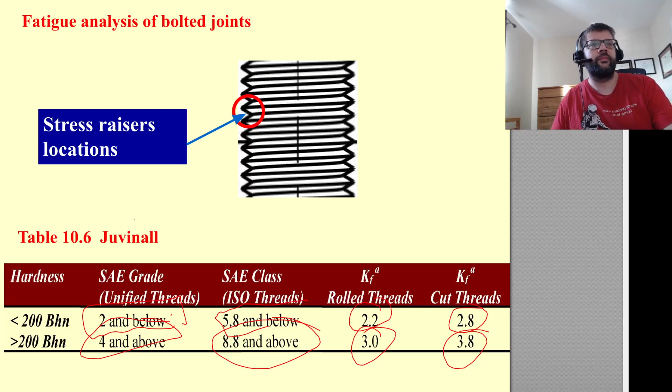And of course, we need to figure out what our strength is, our SN. Most everything else is going to be calculated based upon the way we know. So we calculate our SN prime the same way. For load factor, again, we are loading our bolts in tension. If that's not what's going on there, then you're loading your bolts wrong. So we're going to be using the CL of 0.9.

Gradient factor, again, that's just based upon what our nominal diameter of the bolt is. So the D that we use here, this is from table 8.1 in Juvinall.

So if the nominal diameter of our bolt is, say, half an inch, and we're working in this range, it's reasonable to extrapolate a bit. So if you're at the higher end of the range, so closer to a 2-inch bolt, then it's not unreasonable to use say 0.7. But you can also just pick something in the middle there. Both of them are reasonable approximations.

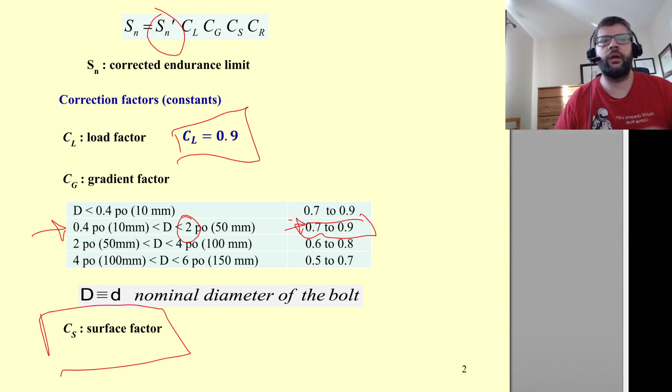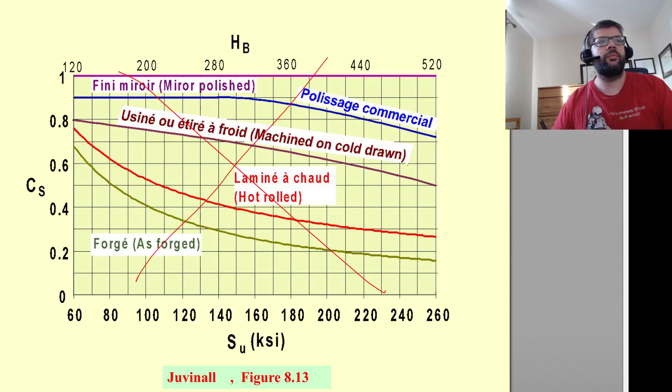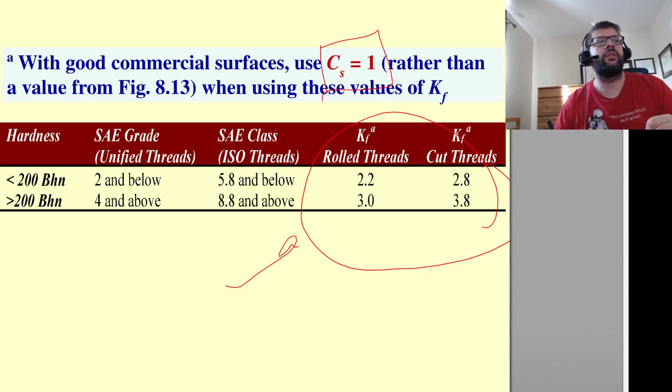For the surface factor, it's simpler. Instead of using this, we don't bother with that, because if we are using a good commercially purchased bolt, they've got good surfaces. So we can just go ahead and use the CS of 1. That's if we're using these values of KF. This is basically the primary thing we're saying here, that this kind of already builds the surface factor into these KFs, basically.

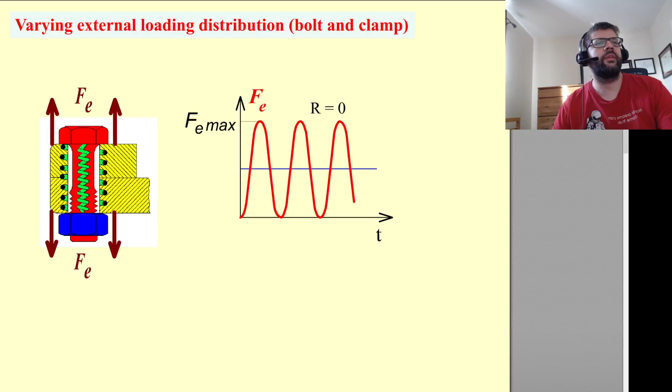So just to review, you're applying your load. It's going to go from a certain amount to a certain maximum. Typically speaking, we're talking unloaded to some max, but it may not always be the case. But regardless, we can essentially break the load that's applied into its amplitude, FEA...

...and then its mean component as well, FEM.

And then based upon those applied loads, so basically the FEM, the mean, essentially increases from the perspective of the bolt. That just kind of increases the initial tensioning a little bit, but you've got to keep in mind that not all of that is going to make its way to the bolt. Some of it's going to be kind of carried by a reduction in the clamping.

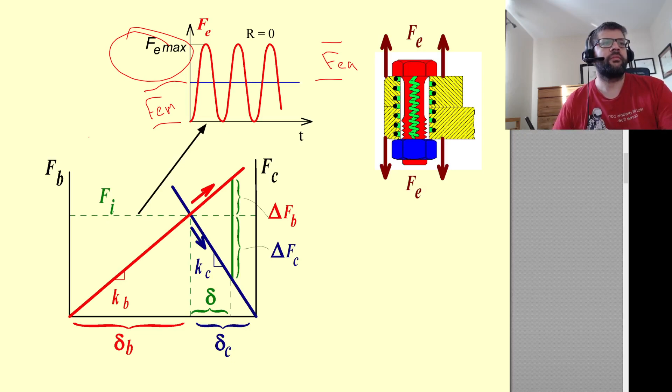So we're worried about what's happening in the bolt. So again, as we apply a load, some of it makes its way to the bolt, and some of it's going to make its way to reducing the clamping strength.

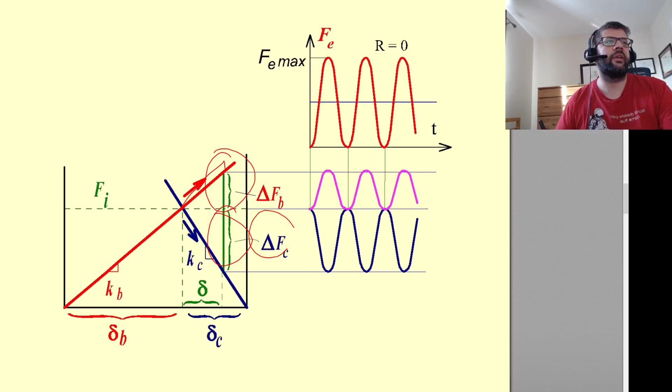So we basically need to break that up into figuring out what the amplitude of the force in the bolt is, and the mean of the force in the bolt is. So again, here's our initial tightening, and then we figure out what the maximum force in the bolt is.

Using this calculation based upon the maximum value of the FE, we can find out what the minimum force in the bolt is, again based upon this calculation, and typically that's just going to be using an FE of 0. But if your load is varying from some other value to F max, then you plug that in too.

Use those calculations to figure out what the minimum and maximum forces in the bolt are, and then from there you use that to figure out what the amplitude and the mean forces in the bolt are.

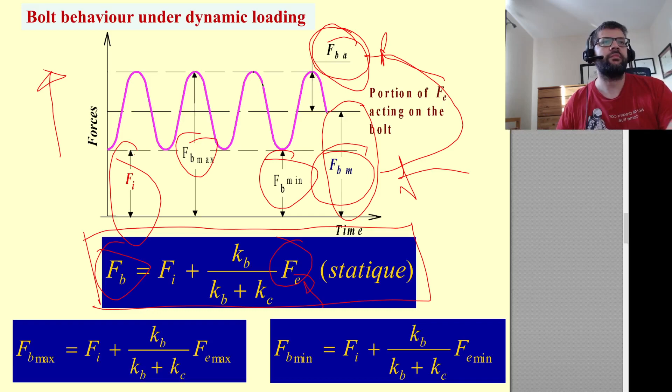Those could typically be calculated directly based upon our Fi and our combination of the KBs and our KCs if we have them, knowing what our FE minimum is and our FE maximum is.

So what we're typically going to be seeing is something like this. We're usually starting out here at our initial stress, based upon the initial load.

We're going to be loading it up, so we're going to be causing some sort of increase in the stress in the bolt.

Now what you need to keep in mind is that we're starting out with just the initial load's going to be based upon kind of our proof strength here, our initial tightening, and then as it's loaded up, we add some portion of mean strength and some portion of the amplitude.

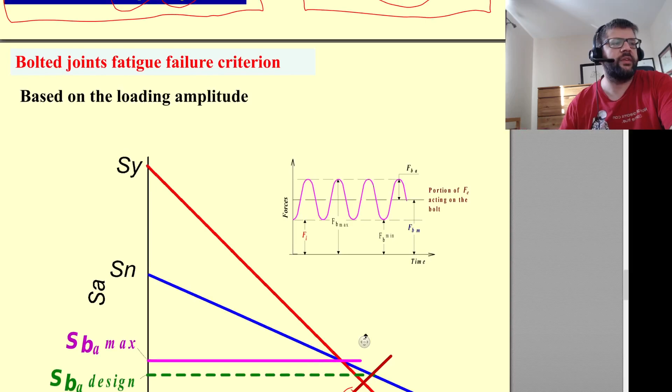So we get a loading condition that looks like that. Sorry, didn't mean this to do that. Loading condition that looks like this.

So what happens is we kind of swiftly have a tendency to shoot past our loading lines here. But we get into that situation that we talked about when we were talking shafts, where as it's loaded up, we're causing yielding in the material, which means we're inducing residual stresses.

So basically, as we pull on it at its maximum strength, kind of at the root tip, we're getting this. We're getting kind of a gross yielding in this area.

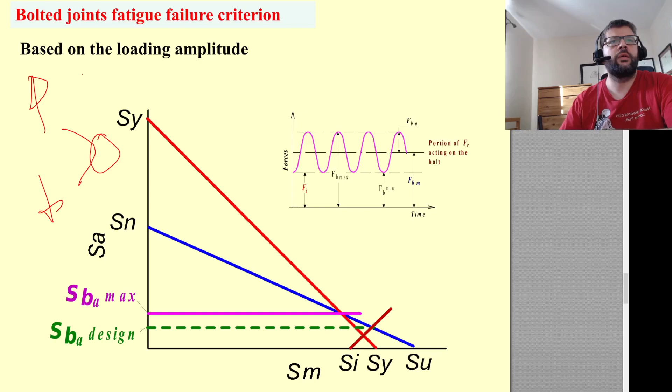So here, let's see. That's happening at each root tip. So at each of these, we're basically getting a tendency for that little area there to stretch out.

But then when we deload it, the next time when we deload it, we've caused some localized yielding there. Sorry, not bulk yielding. We've caused some localized yielding there.

So when we deload it, essentially, as the rest of the bolt kind of wants to contract back down because the load it's seeing is lower, this little bit of material in here, it's bigger than it used to be. So it's going to be resisting the tendency for the rest of the bolt to want to contract. So it's causing a residual compressive stress.

And then the next time you load it up again, you need to load it up enough to overcome that residual compressive stress before you get to tension at that area. So you've induced some sort of loading condition that causes localized yielding that helps you out.

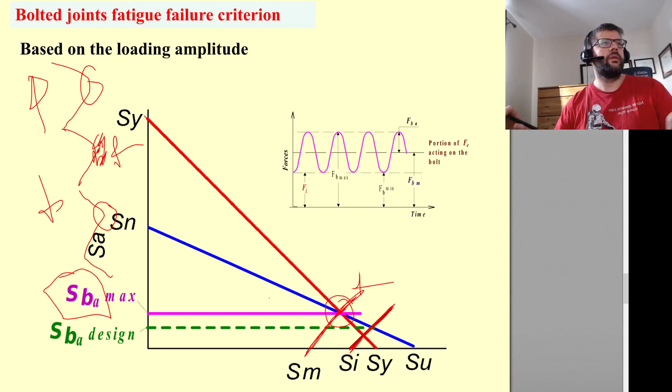So that SBA max can be calculated based upon the known values for the strengths that we have - our SN, our SU, and of course the SY. So we can calculate that, and that's basically going to be our maximum amplitude that we can apply to the bolt.

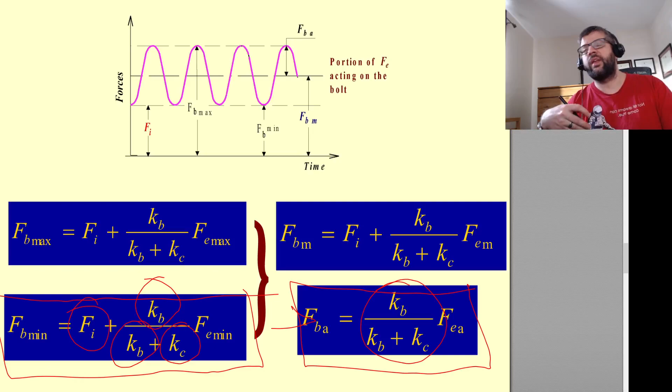Before expecting failure. And then we take our actual design stress, which is just the amplitude of the force in the bolt that we see, again calculated based upon what we see going on here, and the combination of the stiffnesses of the bolt and the joint, and of course the area in the threads, and then that KF, we have to take into account.

So then our SBA design needs to be less than the SBA max divided by our factor of safety. Or another way to put it is that our factor of safety is going to be equal to this SBA max divided by our SBA design.

And yeah, relatively simple calculation from there. So this over this gives us our safety factor. And then as long as the safety factor we calculate for the actual condition is greater than the safety factor that you're supposed to be designing for, then you're good to go.

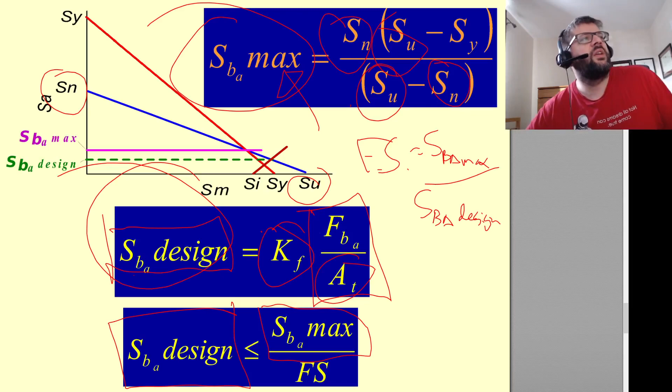So let's do a quick example here. We got a joint, 2 aluminum plates, bolted together with 1/2-inch UNF grade 7 cold rolled bolts. If the effective area of the joint is 12 times the corresponding effective area of the bolt, that helps us find our KC and our KB. The tightening load is 90% of the proof load, and we apply an axial load between 0 and P. We need to figure out what the maximum loading of P we can have here is to still support infinite life for a safety factor of 1.3.

So I'm going to go ahead and open up OneNote here. I am going to screenshot that. And let's start with the stuff that's in this lecture, I guess.

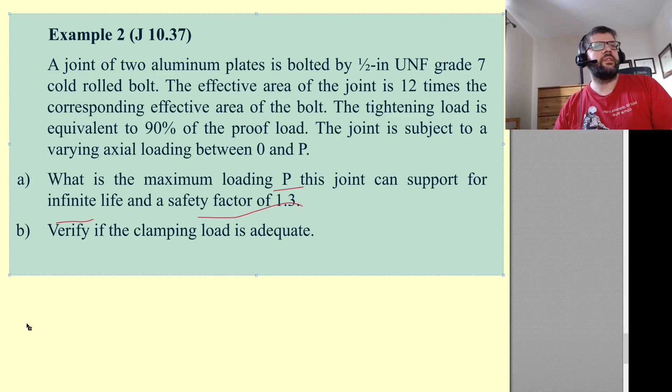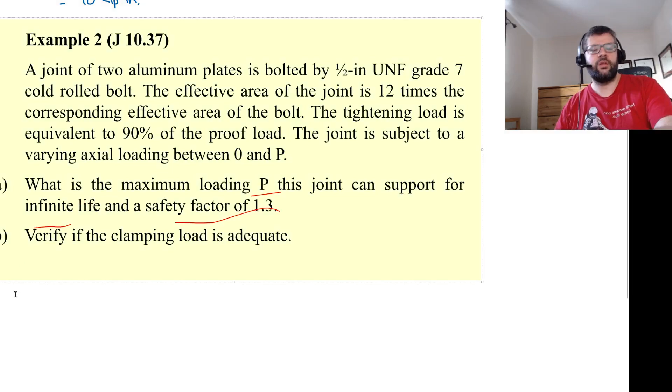So first off, let's figure out what our SN is. We need an SN equal to SN prime times CL, CG, CS, CR. We weren't told anything about the CR, so let's assume it's 1. And the CS is also going to be 1 because we're working with a high quality bolt. So those both end up being 1.

CL is 0.9. CG is based upon the size of the bolt, so it's a 1/2-inch bolt. Going back to here for a 1/2-inch bolt, we're working within this range, so let's go with 0.8 for that, I suppose - right in the middle of that range.

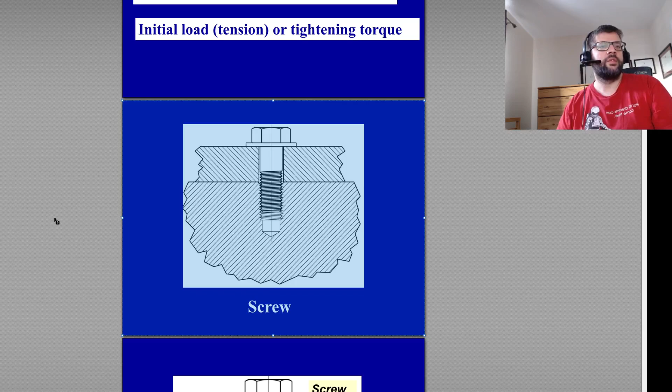And then our SN prime is going to be based upon the grade of the bolt. So we could go back to the previous lecture, let's see here. So we got the different classes of bolts that can be used, and we are working with a grade 7 bolt.

So let's go ahead and copy and paste those values there. Working with a grade 7 bolt. Oh, I guess, never mind, I didn't have the headers at top, so that's going to be useful. So let's just write that down. So proof load, let's get what values we need: the proof load, the yield strength, and the tensile strength - so the SY, SU, and SP.

Start off, the one that we're going to use in this calculation, we need our SU because our SN prime is going to be half of our SU. SN prime is equal to half SU, which is equal to 0.5 times our SU, which is 133 KSI.

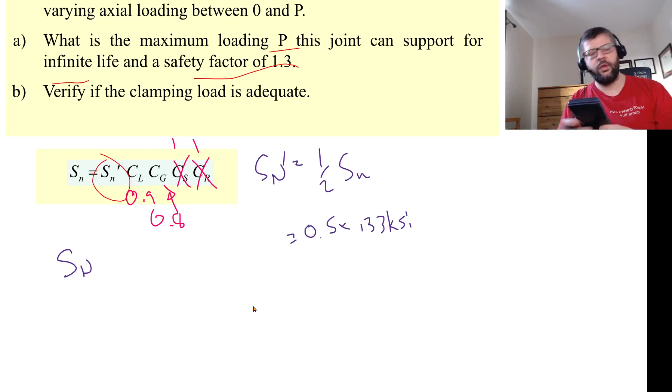So that means that we can calculate what our SN is. Our SN is going to be equal to 0.9 times 0.8 times 0.5 times 133. And that gives us 47.9 KSI.

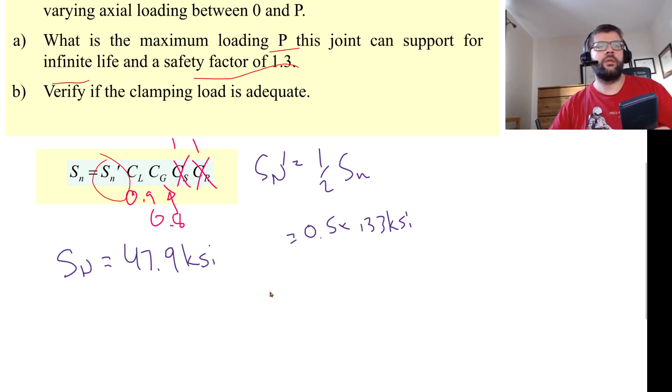So I got our SN, got our SU is equal to 133 KSI. We've got our yield strength - let's write that down - so 115 KSI. And we're also going to need what our proof strength is, so our proof strength is 105 KSI.

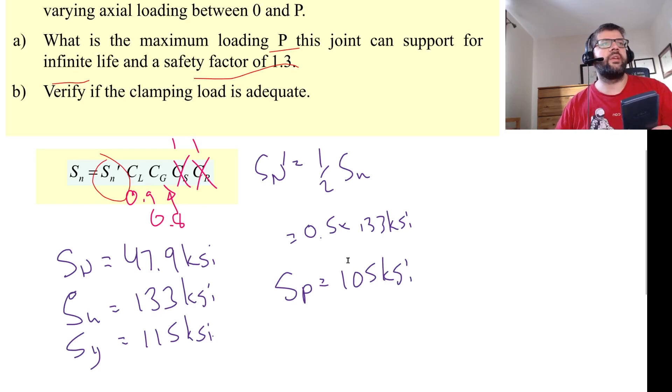So proof strength is 105 KSI, and we were told that it was tightened up initially to 90% of the proof load. So that means that the initial stress is equal to 0.9 of 105.

So that'll be equal to 94.5 KSI. So that's the initial stress.

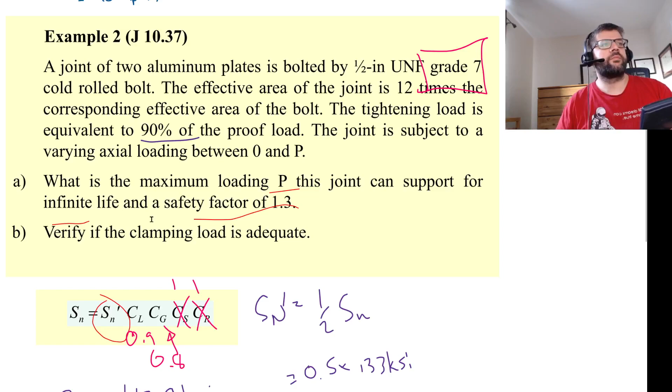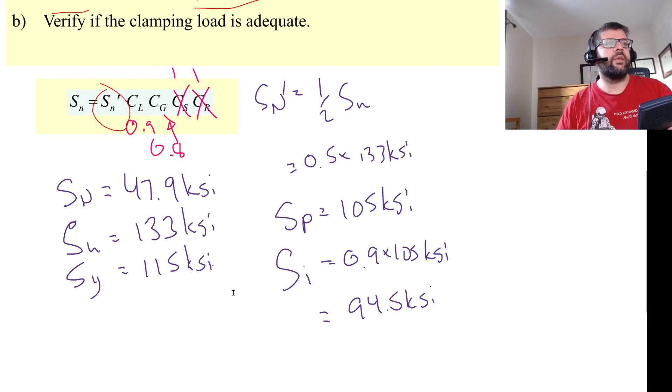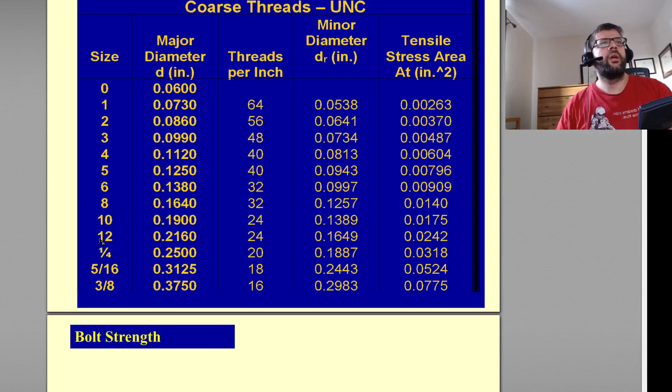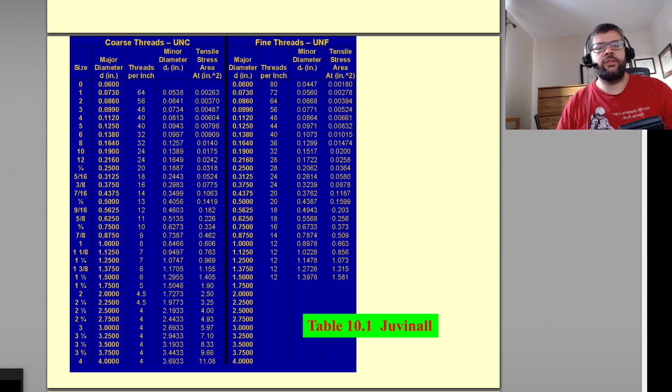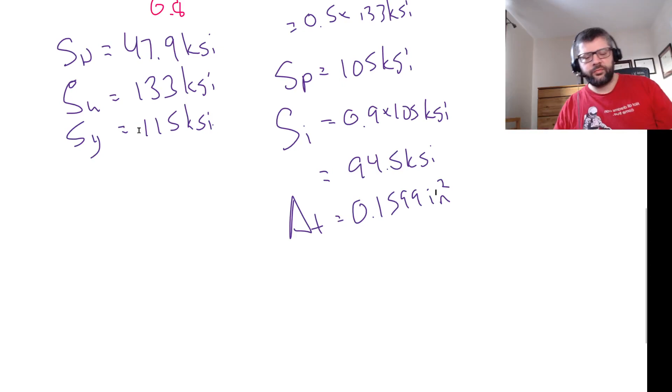.1599 inches squared. So, what other stuff can we figure out based upon what values we've got here?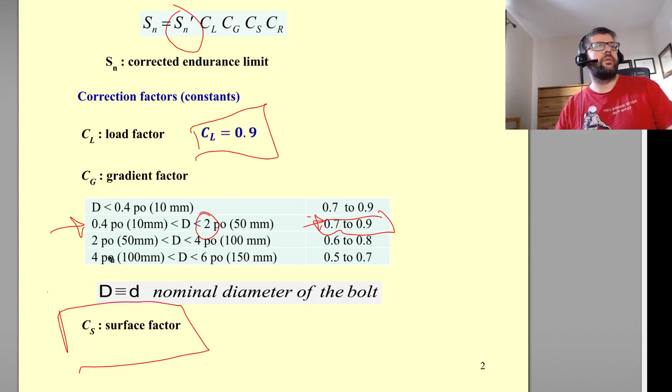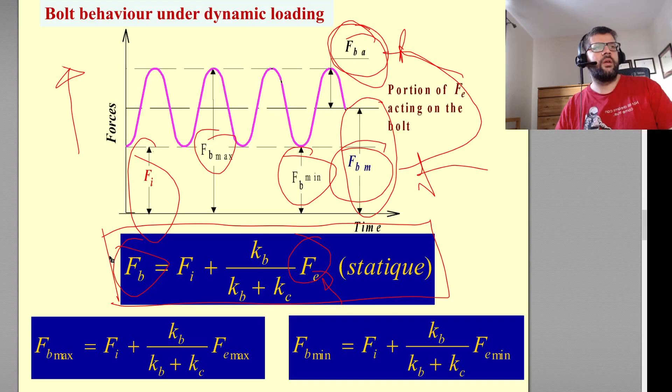So if we go back to... well, if we know what safety factor we're trying to apply, we're trying to go for, that allows us to figure out what basically our allowable SBA would be, our SBA design. Because we also know the SBA max is, because we know everything that goes into the SBA max equation. We know our SN, we know our SU, we know our SY. So we know what our SBA max is.

We also know what our initial stress load is, our SI. That was just 90% of the proof stress. What else don't we know here? So we don't yet know the KF. We can look up what that'll be.

So let's just first figure out what our SBA max is. So SBA max is based upon that equation. SBA max is based upon our SN, so 47.9. All these are in KSI, so we know that KSI times KSI divided by KSI gives us KSI.

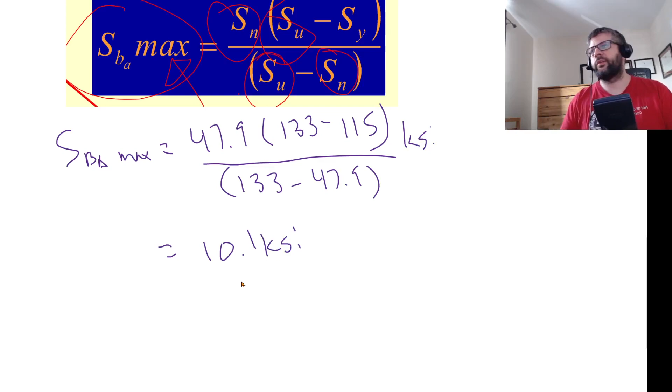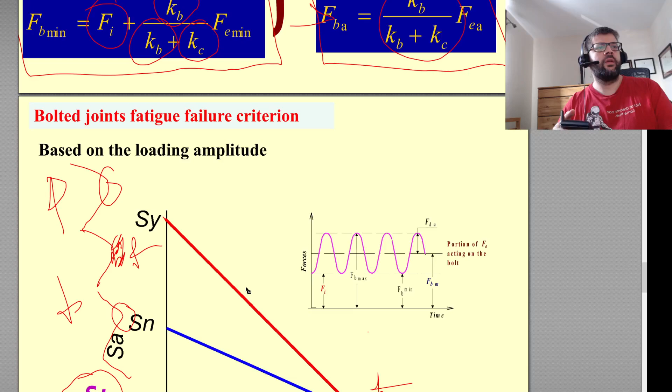So we've got that. We need to know what our KF is. So again, we're just looking it up on this table here. So we're working with an SAE grade of 7, so it's a high strength bolt, so it'll be 4 and above.

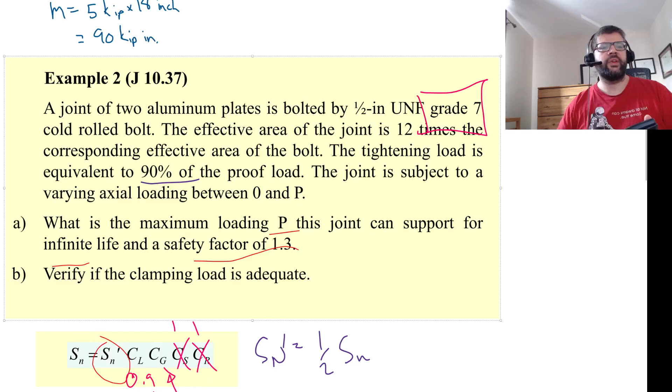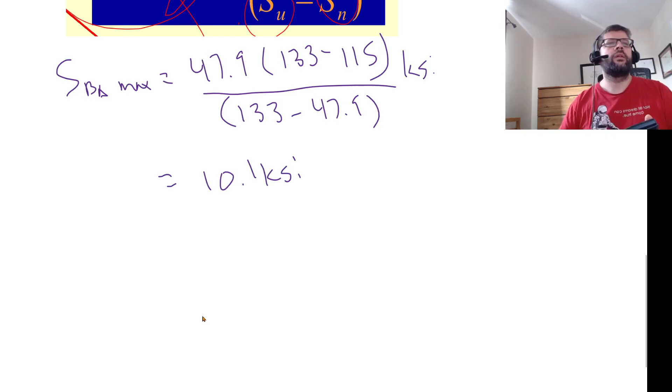It does specify here it was a cold rolled bolt, so it wasn't a cut bolt. So we're in the rolled threads column, and we're in the high strength row, so we're looking at 3.0. I'll just write that down, right down here. KF is equal to 3.0.

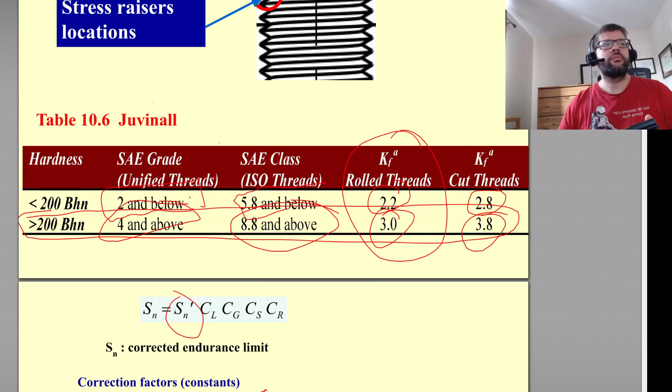Okay, so going back down to here, what's the other thing? Let's see. So the only unknown that we have here really is the force in the bolt - sorry, the amplitude of the force in the bolt. So we know what our AT is, we know what our KF is.

We don't yet know what this force is. We can figure out what our SBA, what our maximum SBA would be, just based upon this equation here. So if we solve for our SBA design, that'll give us the maximum value we can use for that. So our SBA design, or the maximum value of our SBA design in order to meet the factor of safety we're looking for, is just the SBA max divided by the factor of safety.

So we're looking for a factor of safety of 1.3. If our SBA max is 10.1, then that divided by 1.3, SBA design max - I'm going to put max there - is equal to 7.8 KSI.

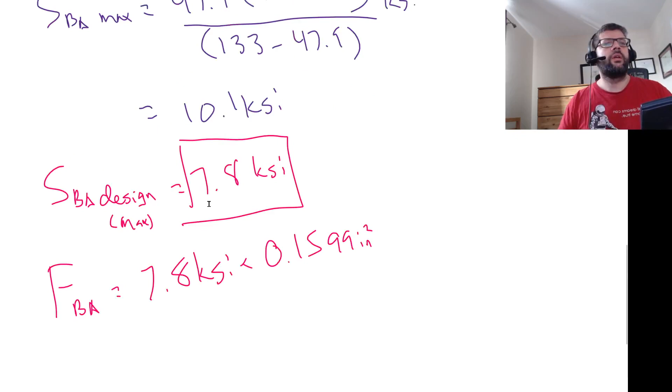So we can solve for what FBA is based upon that. FBA is equal to the SBA, 7.8 KSI, times the AT, so AT of 0.1599 inches squared, all divided by the stress concentration factor of 3.0.

Solve for this, just multiply out by the AT divided by the KF. So 7.8 times 0.1599 divided by 3.0, that gives us an FBA of 415 pounds.

As I'm multiplying this out, the KSI, that's 1,000 pounds per square inch. The inches squared cancels out. So punching this directly into the calculator will give us a value that's in thousands of pounds, and then it was 0.415. So anyways, 415 pounds is what our FBA is, the maximum allowable FBA in order to still meet our design criteria.

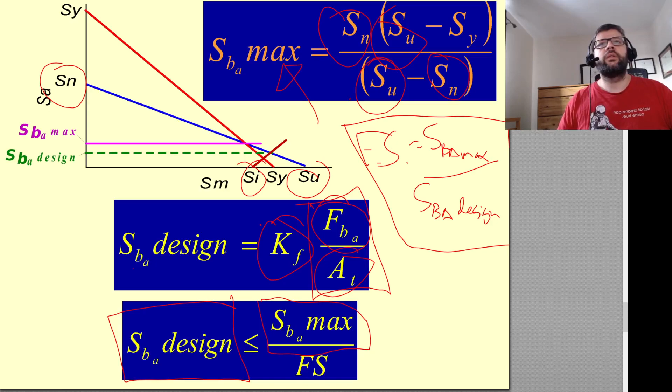So we know what our FBA is. The next thing we need to do is figure out, since FBA is the maximum amount of force or load that can get to the bolt, we need to translate the applied force to that. That depends upon our stiffnesses, right? So if we go back to here, let's see, just keeping in mind...

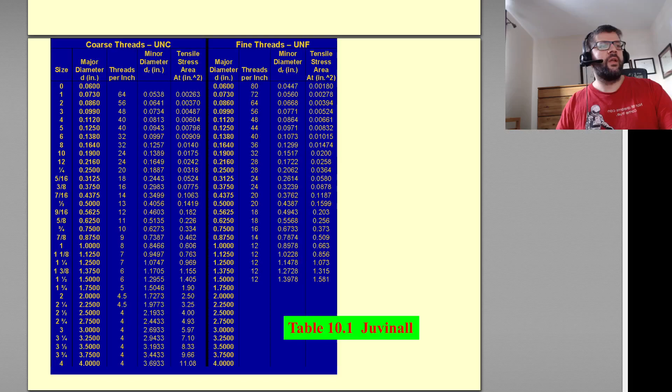Our FB in general is going to be the initial load plus the applied load times KB divided by KB plus KC. Now if we're looking for the amplitude, that's just the variation, so instantly we toss out the FI because that doesn't come into play for the amplitude. The initial load affects the mean stress only. It does not affect the amplitude of the stress because it's constant.

So our FBA is going to be equal to FEA times KB divided by KB plus KC. Now in this instance, we are working with an FE that varies from 0 to some load P. So in that case, our FEA is equal to P over 2, because we're going from 0 to something, then back down to 0. So our mean and our amplitude there are both half the maximum load.

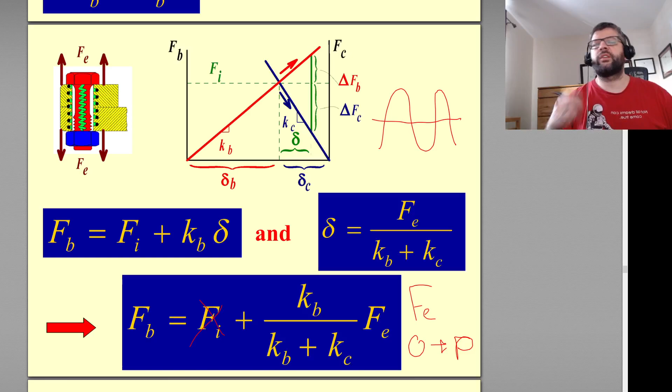So our FBA is equal to P over 2 times KB over KC plus KB. So if we want to use these equations to solve for what our maximum P is, then we need to figure out what that ratio of those stiffnesses is, the KB over KC plus KB. Fortunately, what we were told is the ratio between the effective areas, so we can use that.

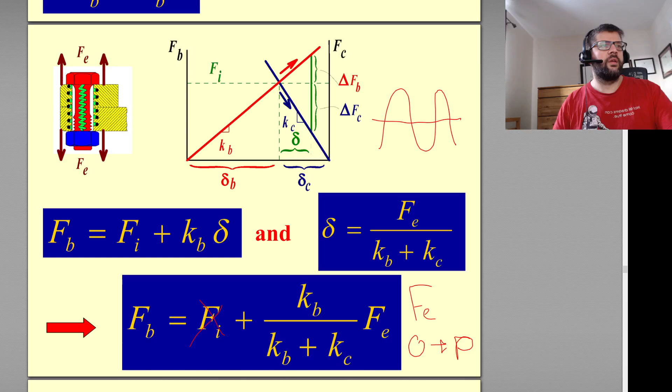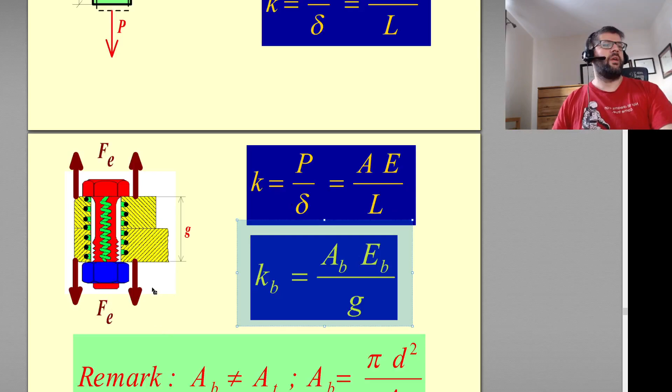So we know that KB is equal to the area of the bolt times the Young's modulus of the bolt divided by the grip there. And then for the joint, we got that. So what I want to do is figure out what KC is in terms of KB.

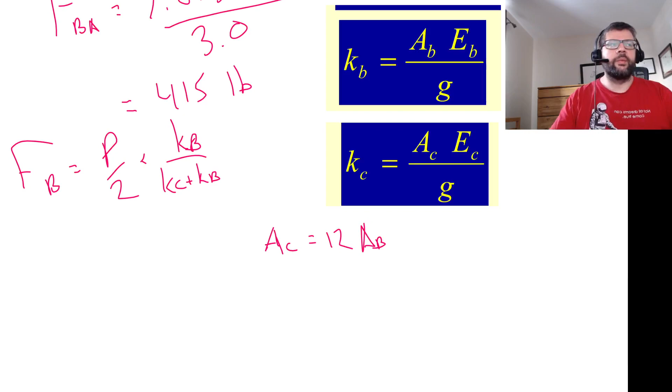So what we can do here, we know that we can take, we know that in this instance, the AC is equal to 12 AB. And we can also, the other thing that we know is what the stiffness values are here, the EB and the EC. So we can look those up.

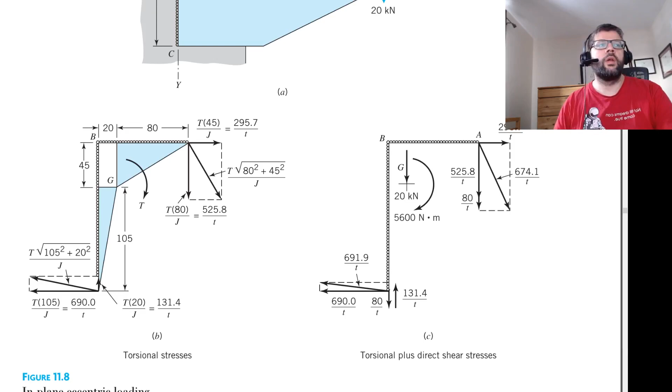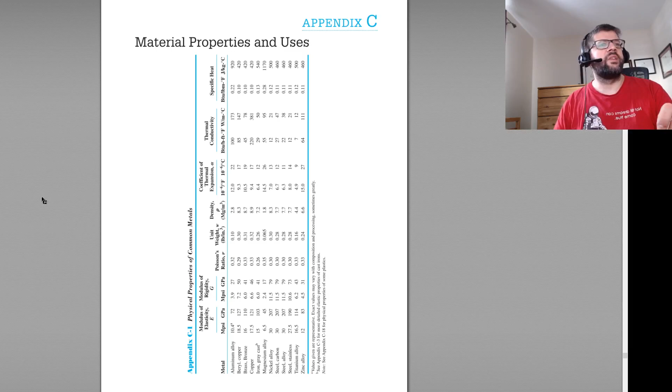So I'm going to go ahead and open up Juvinall's here, just to double check what the stiffness of those two materials are. So let's see here, let's go for Appendix C1. I'll rotate that so we can read it.

And we're looking for what here? We're looking for the modulus of elasticity for steel, and we're looking for the modulus of elasticity for aluminum, because that's the two materials we're working with. It's two aluminum plates bolted together for the EC, and it is a steel bolt for the EB.

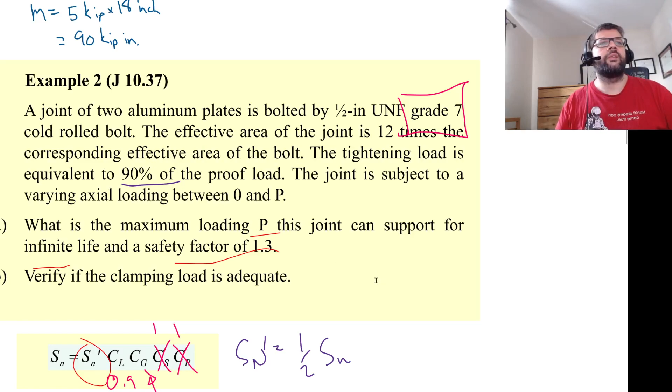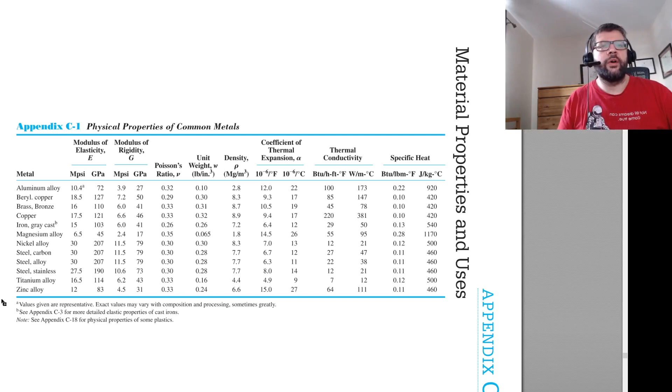So the modulus of elasticity for the steel is 30 MSI, or 30 mega PSI, 30,000 KSI. And the modulus of elasticity for the aluminum - again, it has more of a tendency to vary, but since they didn't specify, just pick a representative value, the one that's in the chart works - is 10.4 mega pounds per square inch.

So if we want to figure out what our KB is, if we want to figure out what this kind of ratio here is, we are just working with AB times 30 times 10, I'll put MSI here.

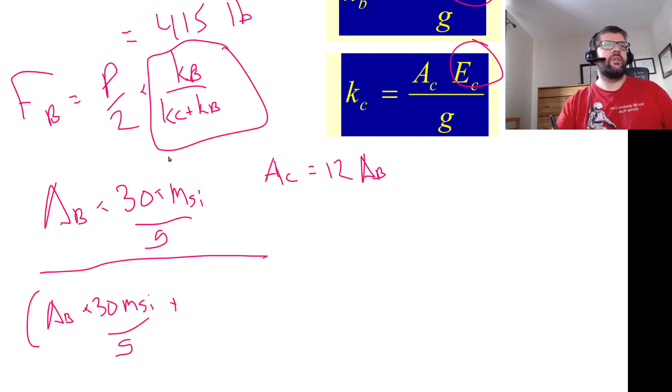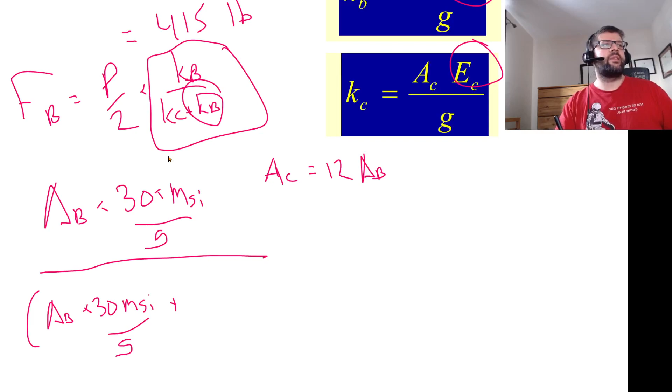Divided by G, and all of that over the same thing. AB times 30... MSI over G plus KC. I guess I did the KB one first instead of the KC one, but anyways. So the AC, I'm going to plug in there. We know that AC is 12 AB times the EC.

So the EC there is 10.4 MSI divided by G. Everything here is divided by G, so on both the top and bottom we can cancel out the divided by G's. And everything here is multiplied by AB, so we can cancel out the AB's. Everything left is in units of MSI, so let's cancel out the MSI's too, and we're left with a nice dimensionless ratio.

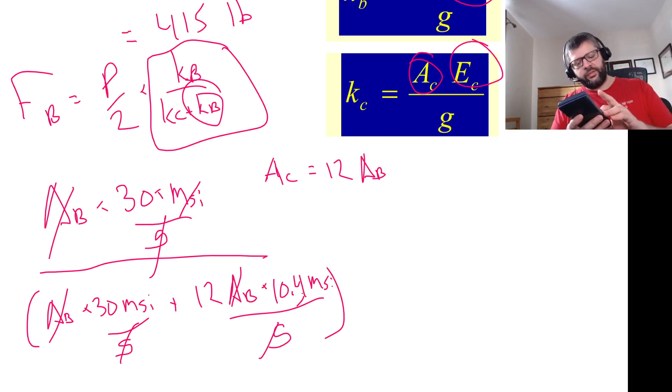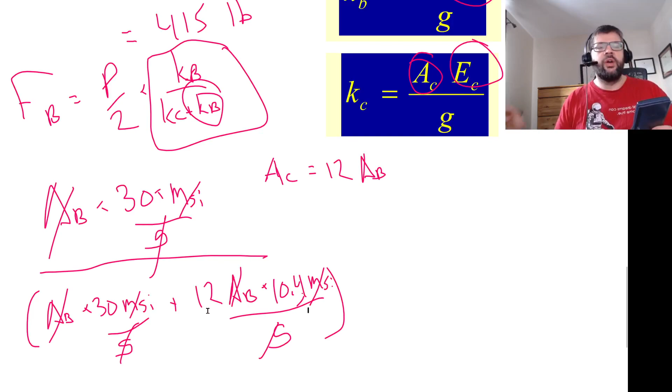So we have 30 divided by 30 plus 12 times 10.4. That gives us a KB over KC plus KB ratio of... under 1.94.

So our FB is equal to P over 2 times... sorry, did I say 1.94? Sorry, my bad, I'm reading off the calculator wrong because I often say numbers wrong. My bad, it's 0.194.

So that is what our FB, that was supposed to be our FBA. That's our FBA because we already took into account the fact that the load is its amplitude portion by dividing by 2 - it's also the mean, this would also be what the mean is, but anyways. So that's our FBA, and that's kind of the load side of the equation. The strength side of the equation is up here.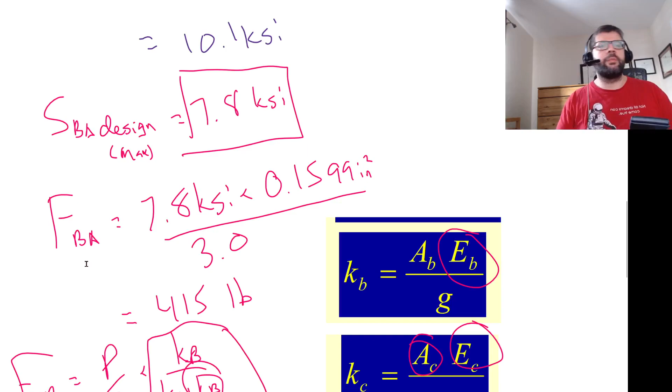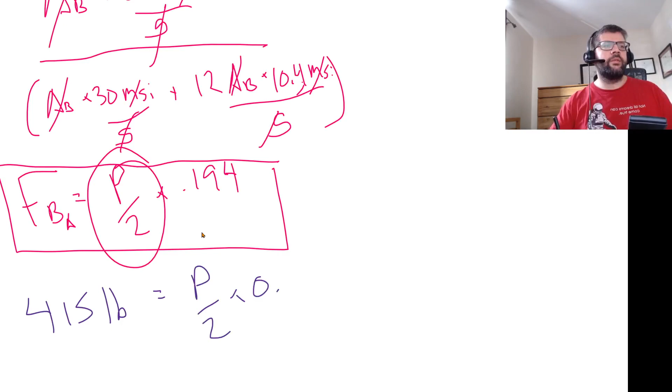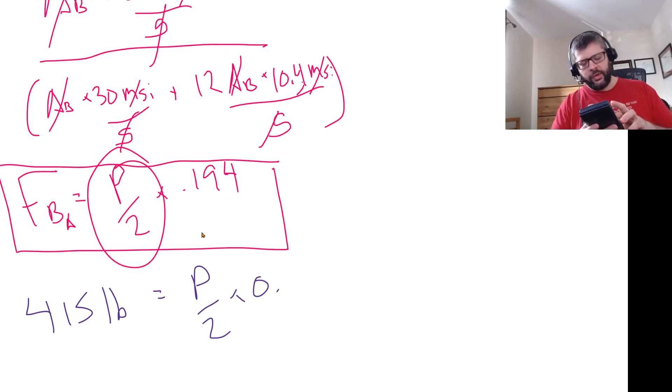So our maximum FBA is equal to 415 pounds. So 415 pounds is equal to P over 2 times 0.194. Therefore, the maximum P that we could use for that varying load is 415 times 2 divided by 0.194, so that'll be 4.3 kips.

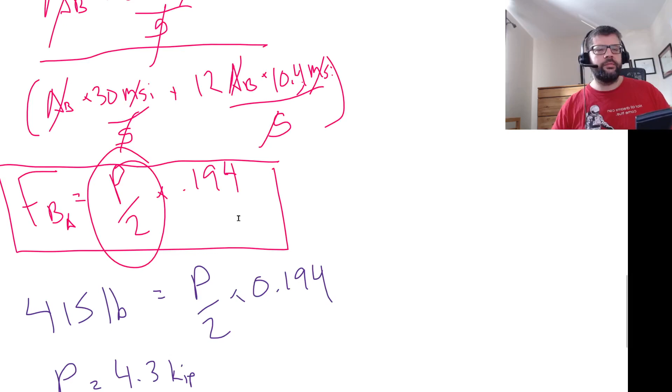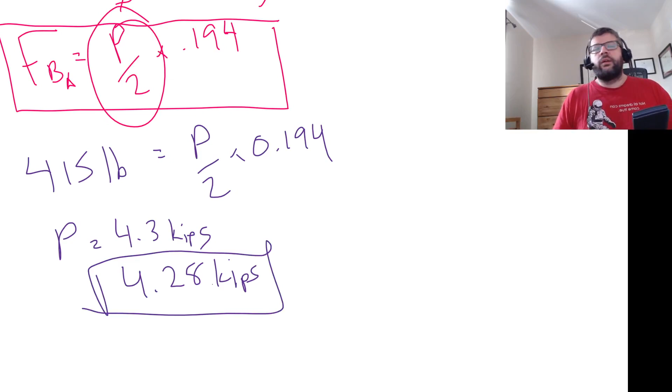4.28 kips, let's go with that - don't want to be too aggressive with the rounding. So that is the answer to the maximum loading P that this joint can support for infinite life when you're loading it up from 0 to P.

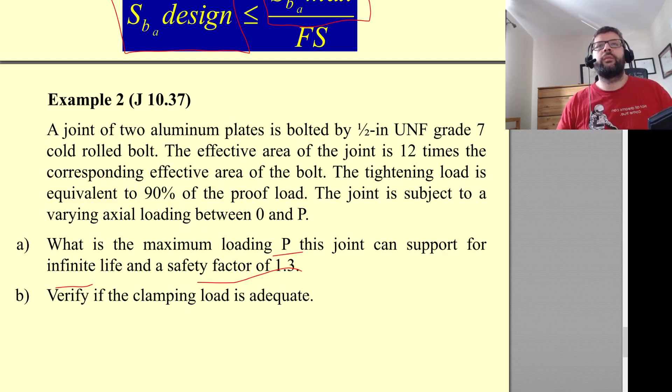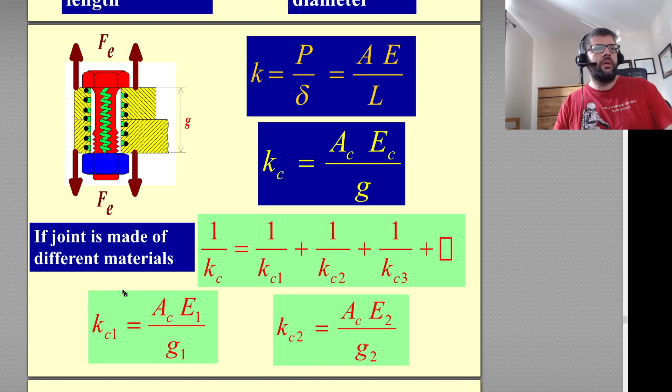Second step here, we also want to verify that the clamping load is adequate. Basically we want to make sure that when that load is applied, we still have some clamping going on. So again, where do we have that formula here - in that instance, we need to make sure that FE is still less than FI times KB plus KC divided by KC.

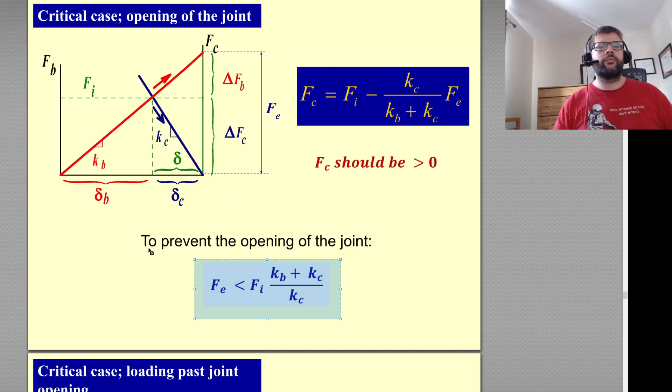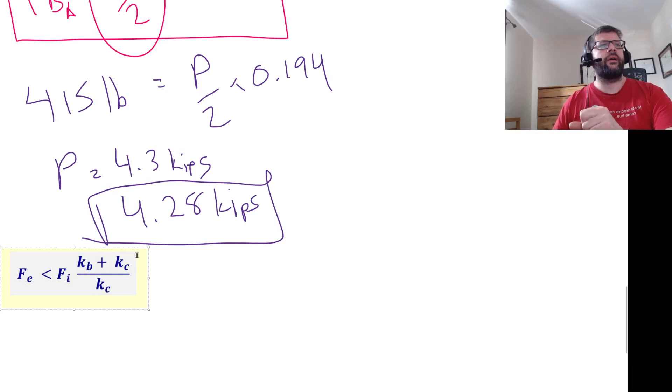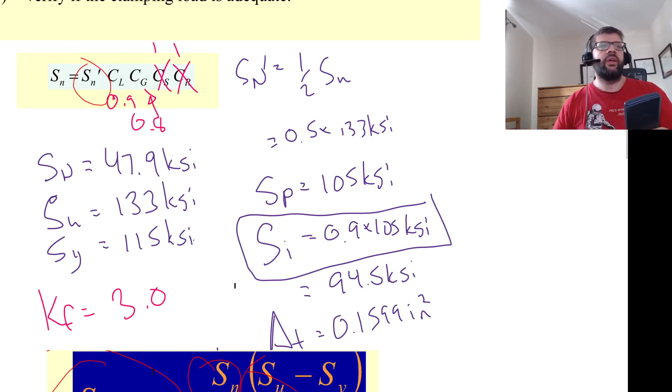So I suppose we need to figure out what the initial load is, the FI. We know what the initial proof strength was, the initial stress was, but we never went ahead and calculated that in terms of initial tightening. So we would do that by taking our SI here and multiplying it by AT: 94.5 thousand pounds per square inch times 0.1599 square inches gives us 15.1 kips is our FI.

And then we got this ratio here - same idea for the calculation, except you've got the KC term on, it's mixing it up a little bit. So we'll just recalculate that. For the KB, I'll ignore the divided by G ones, we know that's going to be canceling out. In fact, I'll just throw the numbers down because we already saw how the units cancel out.

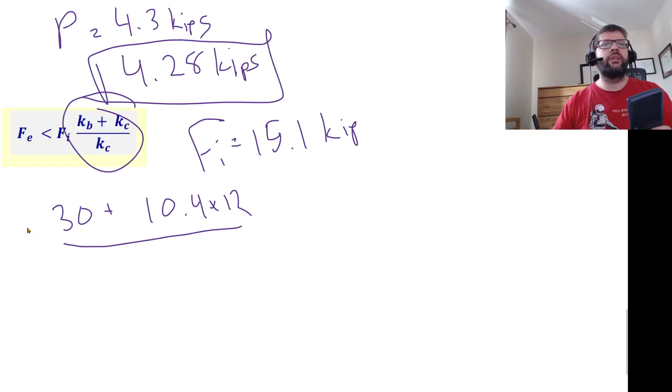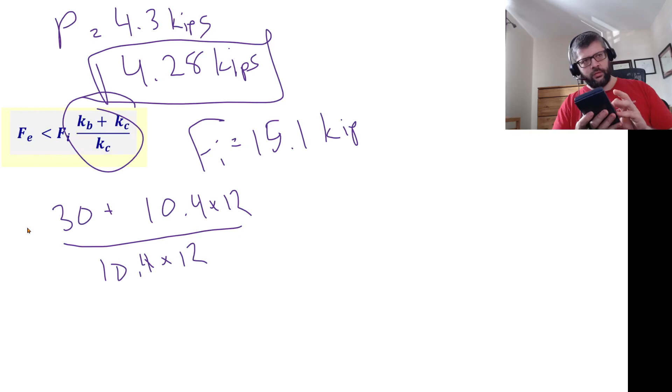So when we're looking at KB, 30 plus KC, 10.4 times 12 - again this is 1 AB plus the 12 AB, and then there's going to be a 12, there's going to be an AB on the bottom, so I'm just preemptively canceling that out for the purposes of decluttering this a little bit. And then the KC, 10.4 times 12. So this ratio ends up being 1.24.

So our FE needs to be less than our FI times 1.24, needs to be less than 18.7 kips. Given that in this instance our P, the load that's applied, is 4.28 kips, that's significantly less than the 18.7 kips, which would cause opening of the joint.

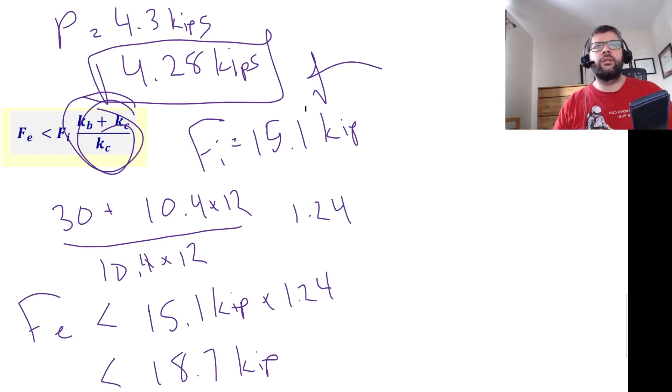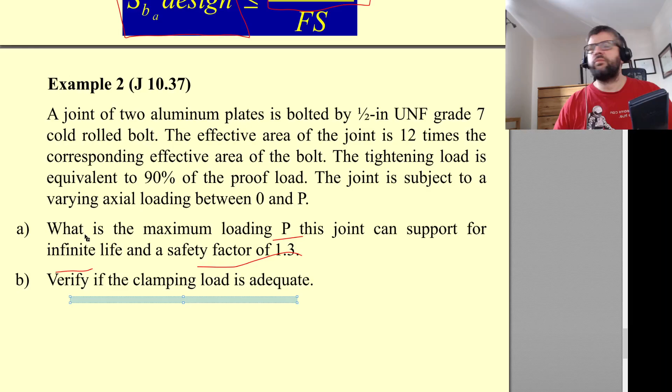So the clamping load remains adequate while we're still loading up here. So that's good, and that's about that.